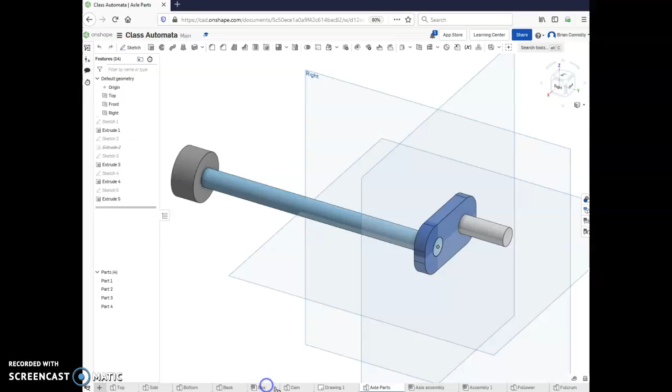It's going to be the box, actually. I'm going to do that first. And this is one where if you were following along in class, we've already done it, so you can probably skip this video and we'll go on to the next one.

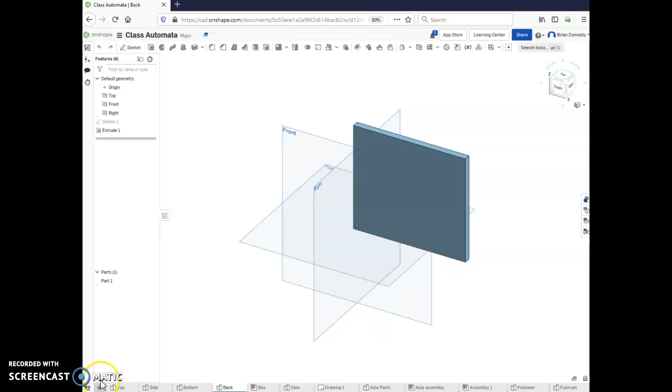For our box project, we have all of our sides and parts and pieces already there. So I'm just going to create a new assembly, and that's going to be my sub-assembly right here. I frequently prefer to right-click rename, so I might call this box example. I'm calling it example because I'm showing this example, and later on I'll probably delete it because I already have a box assembly.

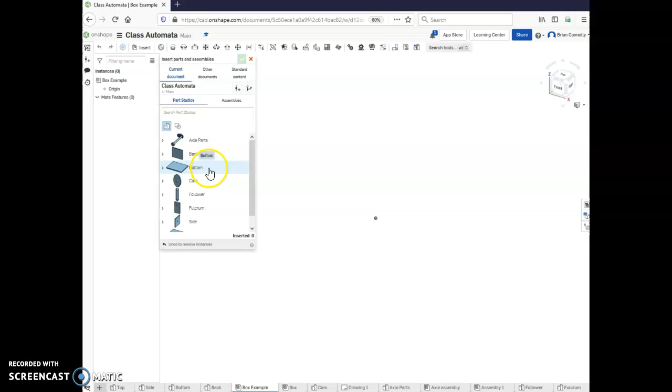Anyway, what I suggest doing is finding one of the parts, and for this part I'm going to put in my bottom first. Then I'm going to get out of that and do a very important step, which is fix this. The reason I fix it - I just right-click on the part name, or I can also right-click on the part itself and it shows up.

And I'm going to remove all degrees of freedom. There are 6 degrees of freedom. Fixing it removes all of those and locks it into place.

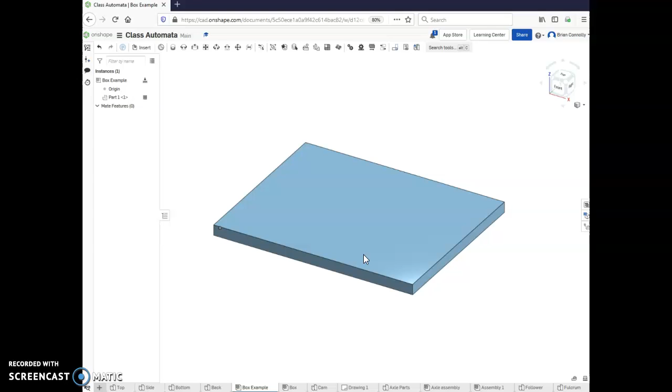So now my part is locked into this place right here. It won't rotate, it won't move, it won't translate along any of the axes or anything like that. It's going to be locked into place. When I put other things on there, it's actually going to lock them into place too, and my assembly won't rotate and won't change in an unexpected way.

Then what I can do is put in another part that I know is related. I could put all of the parts in together as one, but I don't want to - it just gets a little confusing for me. So I'm going to put one in at a time. In this video, I'm probably just going to put a couple of them together and call it good.

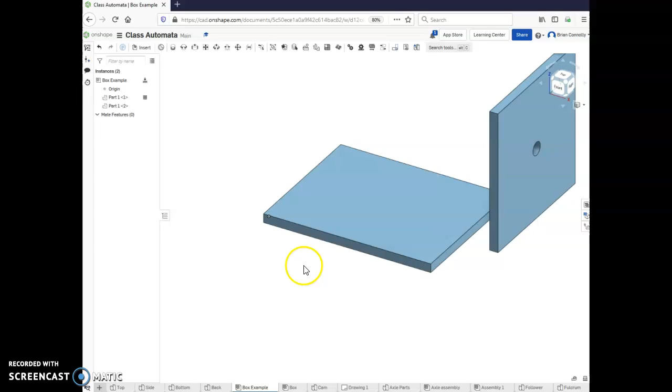Now, when I created these, I tried to pay attention to their actual orientation. That may or may not be true, but there's still a way, even if they're not quite oriented - that's okay. So I'm going to create some mate connectors, and I want to find 2 corners that I can line up. I know the outside of this corner right here, and I'm going to mouse over this flat section because it's going to line up with this flat section here. So I mouse over it, I get this plane.

Then any of my mate connectors are normal to this plane, which means the z-axis is going straight out from it. It's square from the x, which is red, and the y, which is green. So I've got this coming straight out, normal to this plane. I'm going to hit OK with that.

I'll make another one. Again, finding that same plane, it'll be normal to it. I can then select this corner. These 2 corners are going to line up - you'll notice I do these when they're not right next to each other because it'd be really hard to select one separate from the other. So I like to have them a little bit separate, and it's okay if they're rotated or something like that. That's fine. I have both of these line up and look like they're in the correct orientation.

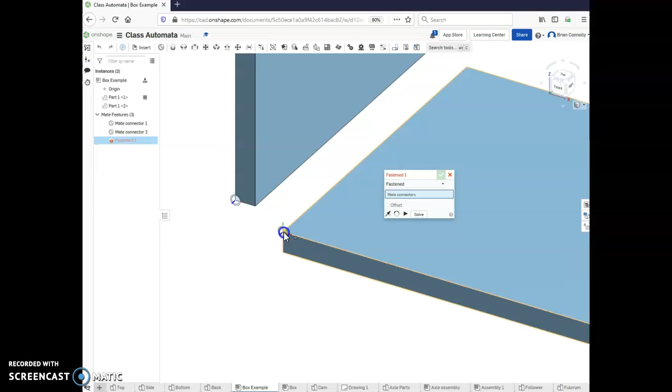So I'm guessing that my fasten mate is going to work. Now I'm using fasten mate because that is going to take my mate connectors and act like glue - it's going to lock them into place. They can't rotate, they can't slide. All it's going to do is lock them into place. It removes all 6 degrees of freedom.

So I'll hit OK, and let's see. Let's test this out.

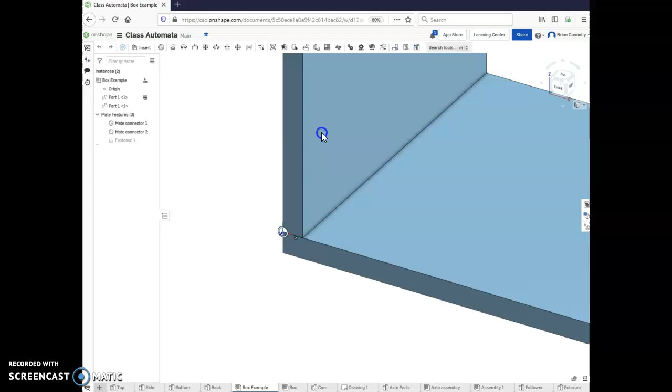And I click and drag. Because I've locked this one into place and this one is locked to it, there we go. That one will not move. So I have 2 parts already assembled, no big deal. I can then insert the second side. I could also do the top as well.

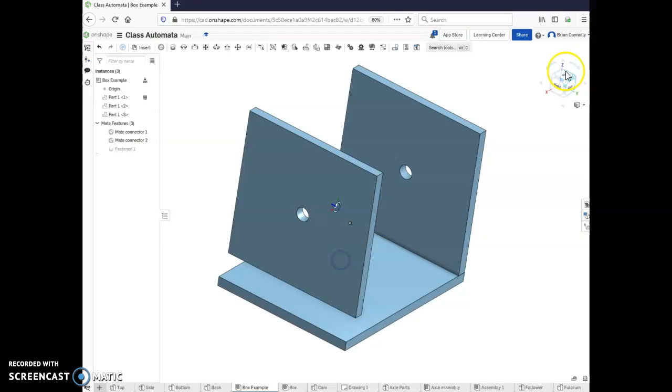Largely it doesn't matter. It is kind of nice to build from one side to the other. Notice I am keeping things fairly separate. I'm not putting them exactly where they need to go. I'm just getting kind of close.

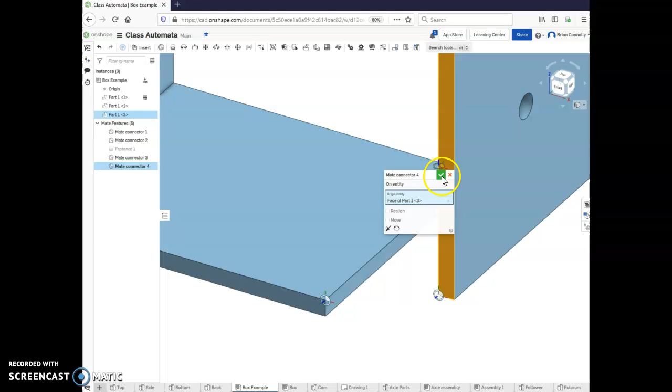And then I'm going to mouse over, find that corner. There we go, that's all good. Going to then mouse over, find that corner, click on it. There we go. Got that other mate connector. They line up and all of that. And so now I can create my corner.

Oh, we've got an issue though. Those don't line up. Now we've got some options. You can flip your primary axis. That might work. You can rotate as well. That might work as well. Or you can create an offset.

And I know along the X, I actually want to go 0.25 over. That's the thickness of it. Click somewhere off, and it did go in the correct direction. If I did not know, I could also go there. So negative will cause it to go the opposite direction.

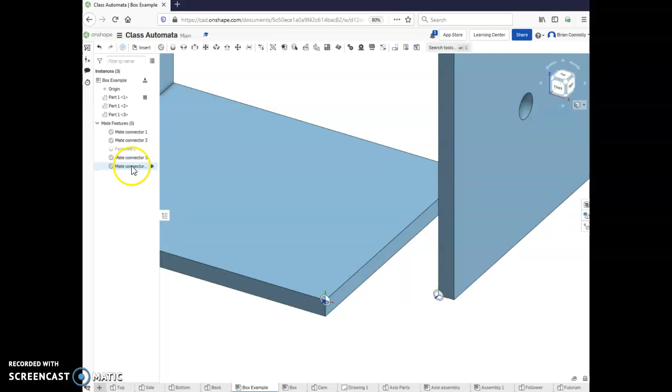I'm actually going to X out of this. I don't like to do an offset if it doesn't make sense. So actually this mate connector is not correct. I'm going to double click on that and edit it and bring it over to this corner, so this corner will line up with the outside there. Now when I select my fasten mate, it will then line up correctly.

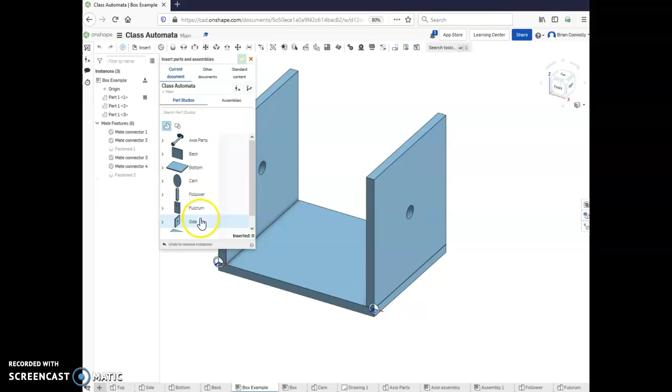Next one, I'll insert the back. You'll notice that as I've been looking through this, I've actually renamed these so I can tell what is the correct part.

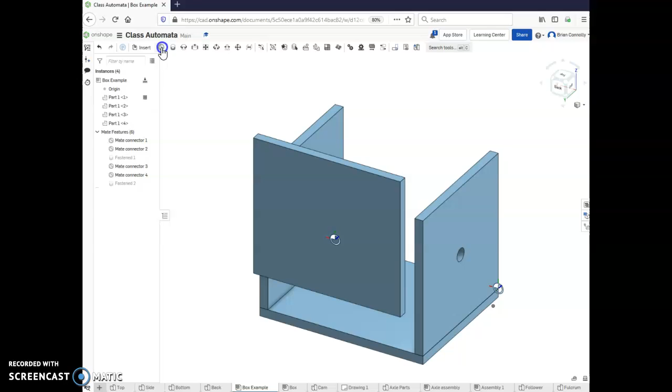Okay, so I'll go back here, change your orientation. You'll want to learn how to become an expert at lining things up or rotating things around, because then you can actually very easily assemble.

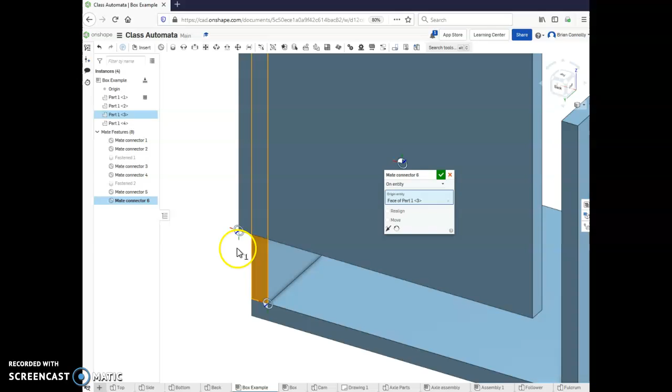Again, looking for it to be normal, looking for that corner that's going to line up. They do line up, so my X is red, my Y is green, and they line up, and then my Z is happening there. So I believe this should work. Let's see. So fasten. There we go, that did line up, that's all good.

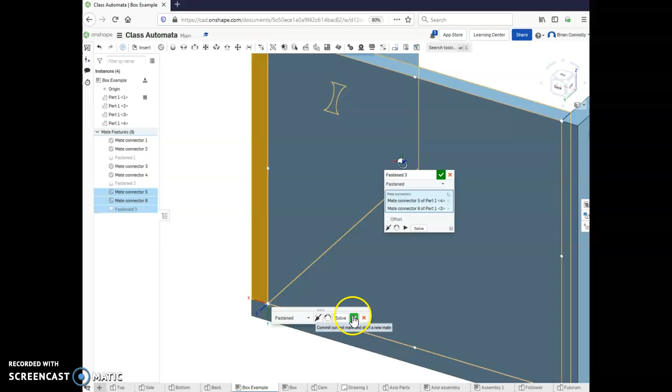If it didn't, I have the flip primary axis option. I've got the reorient secondary axis, so I can rotate around like that. But this is working, it's all good. So I'll just keep going, and I'll put all of them together.

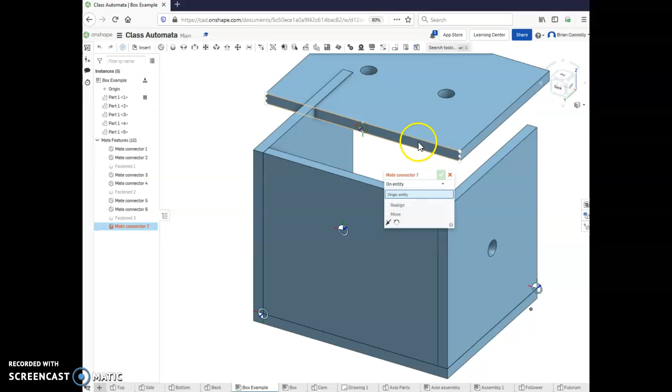So the last one is the top right here. Again, putting it somewhere close, mostly so I can kind of see both of them and relate to both of them. So I got my mate connector here, normal to this face right here. So I'll select that, hit OK.

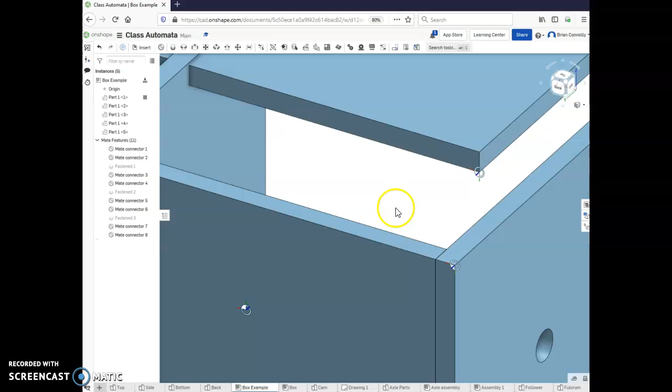Another mate connector, and that corner is actually going to line up out here. So I'll click there as well, and then hit OK. It looks like they're oriented correctly. I can change those, but I don't need to.

So I'm using all fasten mates because this box would be glued together. I don't want it to actually move in relation to each other. So there we go, this is the box assembly. It's all together. One quick little test is if I click and drag and try to move things around, they don't. So this is my first sub-assembly, my box example.

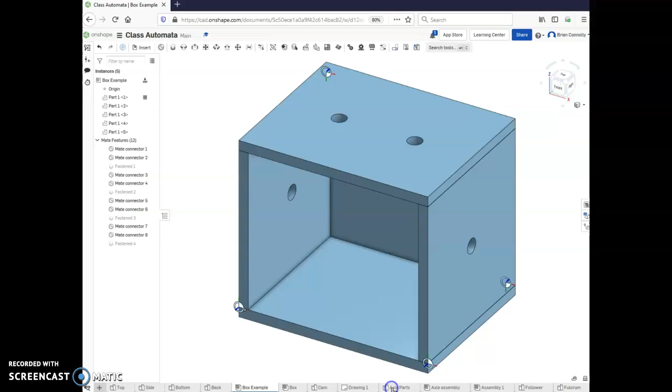All good. In the next video, I will show you how to put the axle all together from your axle parts.